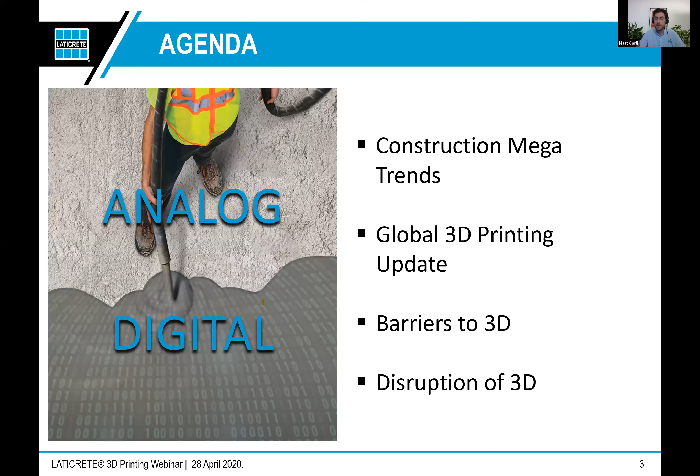Another one that we've seen change gears here with coronavirus is Twente Additive Manufacturing, a partner up in Canada. So they're working with the Ministry of Housing of British Columbia to do micro houses in areas of Northern Canada with First Nations people where they can't find laborers right now. And with construction shutting down in some parts, this is a solution where 3D rises to the occasion.

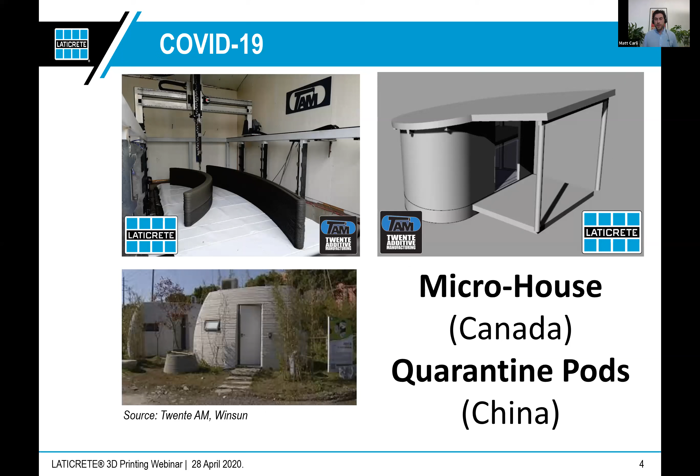But here in the US, we haven't shut down construction completely. We're still seen here as what's called an essential business. So we're allowed to continue operating despite quarantine, shutdowns, self-isolation, etc. But we're also a very litigious society. So making sure that everything is captured and all your workers are safe is a new concern.

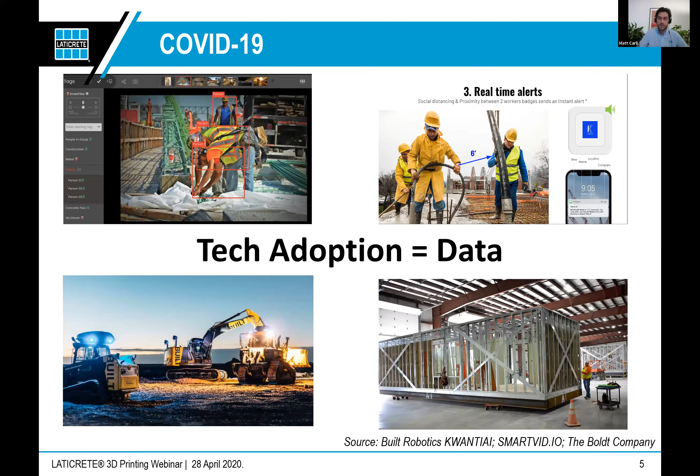So questioning the materials, the complete output of the building as a product is eventually going to work its way into higher rents, higher cost of a higher premium product. And again, you'll see how this connects to 3D printing in a minute.

We're also working with a company in California to do house repairs for the burnt areas. So building new subdivisions, building new homes where there was already a housing shortage, the fires just made the situation even worse.

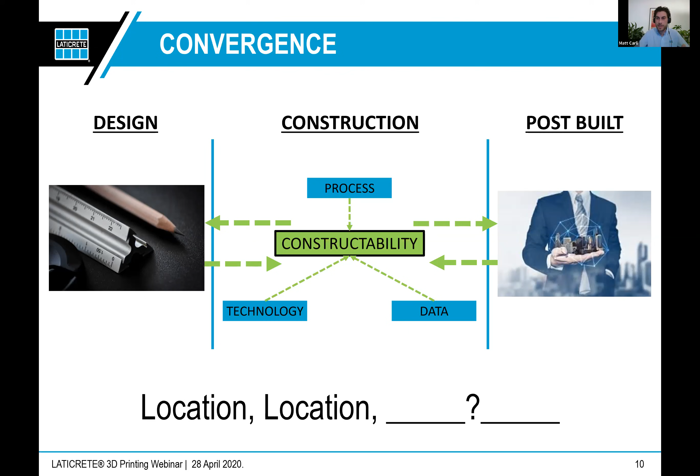So how does this all play into 3D printing? Basically, 3D printing is that computer model. So it's early design phase. You're taking it, you're splicing it into layers, and another name for 3D printing is additive manufacturing. So you're adding layer by layer by layer to construct the building.

So the big so what of this, again, is that as built is equal to the design. So the product that's on the other side is exactly what the design is, which for people in the manufacturing world sounds like a given. For people in the construction world, it sounds crazy. So again, this is the shift of mindset of people from the tech community, people from other industries that are not accepting of this 1% low productivity, or just accepting the status quo that construction projects always go over budget or always have these change orders. Yeah, that's not the new normal.

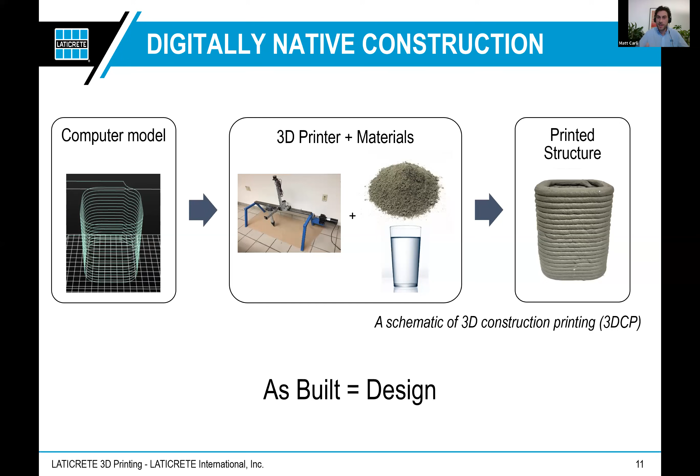Logistics, so this could be location. You look at the US Army Corps of Engineers, they're looking at using 3D printing for barracks in war zones where you don't want to bring people in. The example I gave earlier with Twente Manufacturing, going to Northern Canada, going to remote locations where you're limited with your workforce. 3D printing offers an easy contained solution to execute a job. And in Northern Canada, you also have a small window where you can build. So it brings alternative solutions of a premium product up there rather than modular construction that would have been subjugated to the transport of what you could carry up to some of these remote locations.

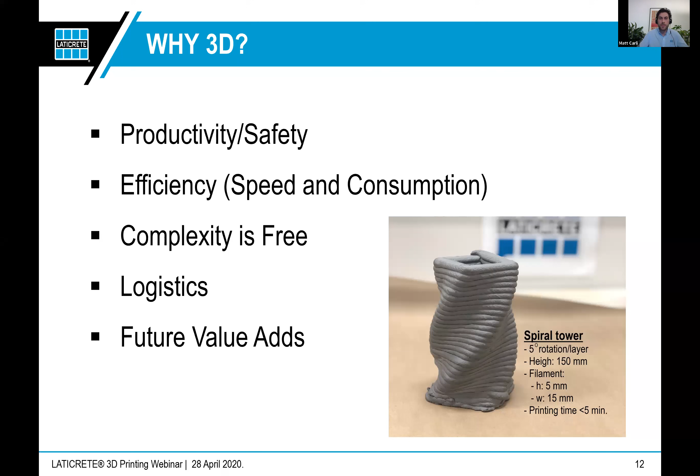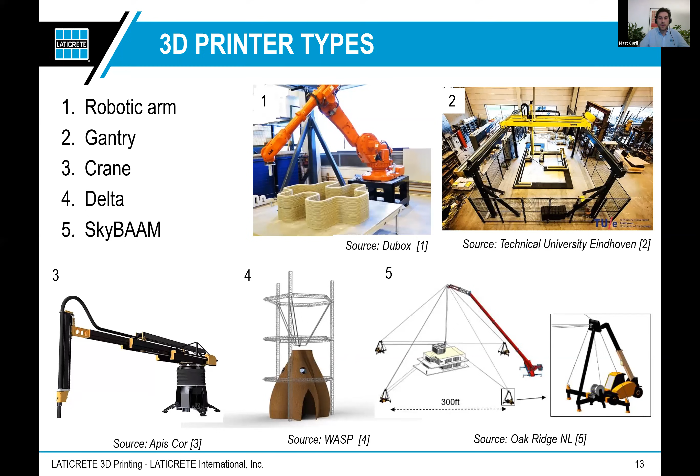Or you have AI SpaceFactory. There was a big push by NASA with a challenge of how do we build on Mars. So using thermoplastics mixed with a Martian-like aggregate. So there are alternatives being developed. And again, a lot is still in the experimental prototype phase.

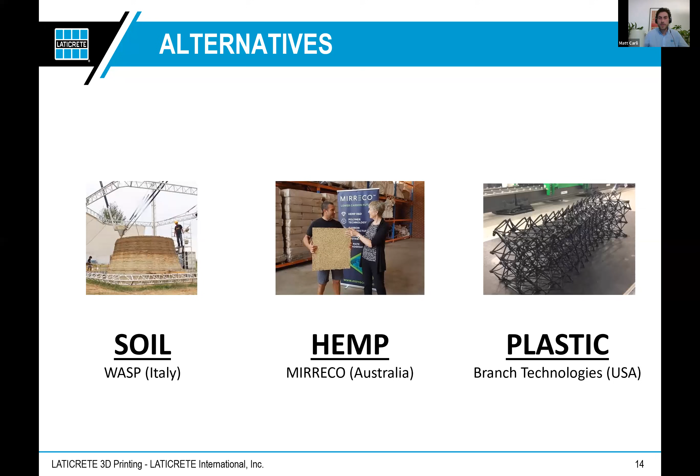So as Yoni mentioned in the beginning here, we're looking at 3 really key development markets for 3D printing. Dubai being front and center. Edward's going to talk much more about the Dubai market. The big announcement there is a government push with the Sheikh proclaiming that 25% 3D printed components will be on the job sites by 2030.

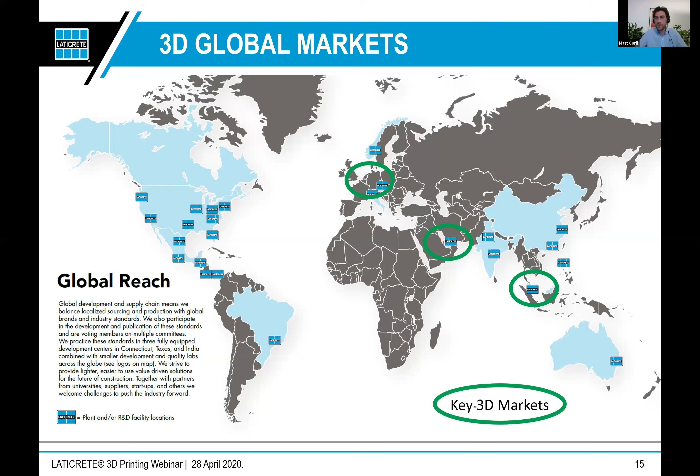So this is obviously a huge call to action, and has created and fostered an environment to bring that actually to fruition. Another cluster that we're seeing is the Netherlands, and then Singapore is a big developmental hub for 3D printing technology. I superimposed it over the Laticrete network. So this is just where we have plants and facilities globally, and looking to capitalize on those to produce the mortar as local as possible.

So what is a 3D printable mortar? There's really three main characteristics behind a 3D printable mortar. First one, thixotropic, or the rheology of the mortar has to be such that you can mix it, pump it. So it has to be fluid under pressure, and then as soon as that pressure is released, it has to hold its shape. So it's extruded out of the nozzle, it comes down, and you want zero slump. You don't want the material to flow out. It has to hold the shape of the nozzle, and then after that, support the weight of subsequent layers.

Behind the scenes, again, it's still an emerging market. So a lot of what we're doing is to make sure that this product is available and ready to be accepted by the market. So the certification, there's a lot. This is an hours topic amongst itself, but we'll talk about it a little bit more in a second. Localization. So again, we're shipping heavy materials here. We're shipping essentially a cementitious mortar mix. So we want to localize as much of the material and produce it as local as possible.

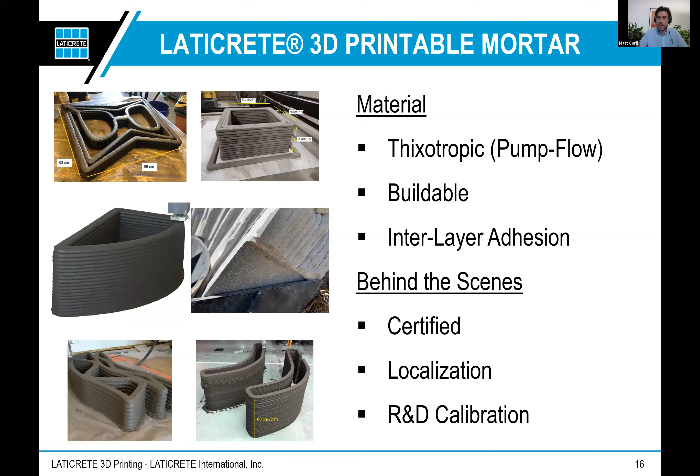In Dubai, looking at the United Arab Emirates, again, we localize the material. We produce in Ras Al Khaimah, the emirate next door. The product was certified by the Dubai Central Lab and also weather tested. We took a sample, printed in early January, then left it throughout the year out on the grounds of our factory, so subjected to all the Dubai heat of the summer, and monitored it routinely for cracks, and happy to report that there weren't any cracks on the printed structure that we left outside. So it definitely performed beautifully, and this is the project you'll hear much more about in detail. And Edouard has some pictures that are going to be released tonight, actually.

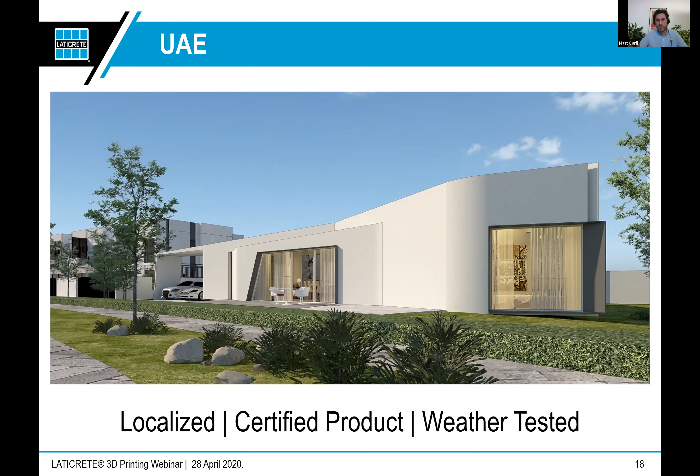This is a big push by the Indian government to make sure that everybody has access to toilets throughout the country. So we're working closely with the government. There was supposed to be a release earlier, with coronavirus and now complete shutdown in India. Hopefully we'll be able to make some more announcements and get this project moving quicker here in the next couple weeks.

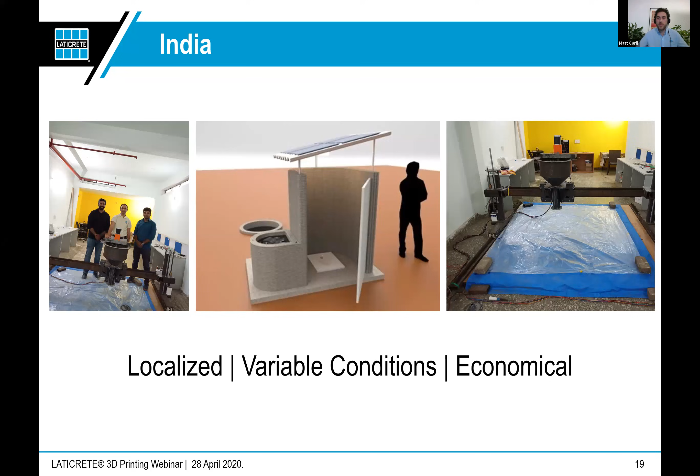Singapore, as the host of this, I just wanted to mention again, it is part of this cluster. We're seeing really strong support from the university side and from the government side. So NAMIC, the National Additive Manufacturing Innovation Cluster, providing funding, coupling with the strong universities, the National University of Singapore and Nanyang. And so we're starting to see this really strong collaboration hub cluster develop in Singapore. That's just an example we just saw with the India project that was developed in Singapore first and then brought to India. So I definitely foresee much more of this happening.

In addition, just a note on the market. So a lot of what we've seen and talked about with 3D printing are standalone one-story or ground plus one structures. A lot of the Asian markets are much denser, so China in particular. So we're probably going to see more in the way of 3D printed facades, components, prefabricated parts that are going to be 3D printed and integrated into structures.

So it'd be interesting as the Asian markets really adopt the technology and take off, that we're going to see really different use cases in Asia and Dubai and Europe. Europe is going to be much more productivity, safety on the job site. Dubai pushing the envelope, avant-garde, just adopting the technology really across the board. And then the Asian markets, we're going to see much more of this integration with facade and prefabrication, at least in my opinion.

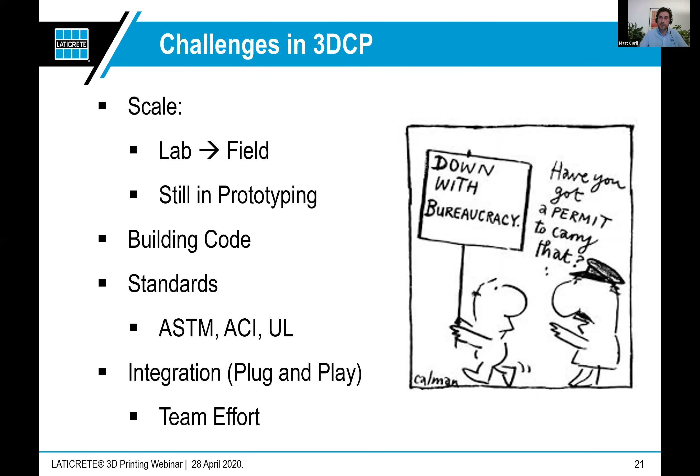But with that, and trying to leave on the high note here and wrapping back to where I started talking about this 1% increase in productivity. Again, 3D printing is not necessarily going to be the solution for everything, but we're talking about an industry that's 13% of global GDP. It's a massive space for disruption to happen in. And why I call it the Trojan horse, again, it's digitally native technology. You have to understand how you're going to build a structure in the early pre-planning stage.

So when you look through this list of where the productivity is going to come from in construction, reshaping regulations, we talked about that, rewiring contracts, people are going to think about these differently. Design, complexity is free, consumer demands, again, 3D printing is a solution. Procurement, supply, it's a completely integrated supply chain. And the takeoff is exact one-to-one. On-site execution, again, your robotics, it's a digital twin. The product is what you're putting in the system. So the output is a one-to-one, as built, matching design.

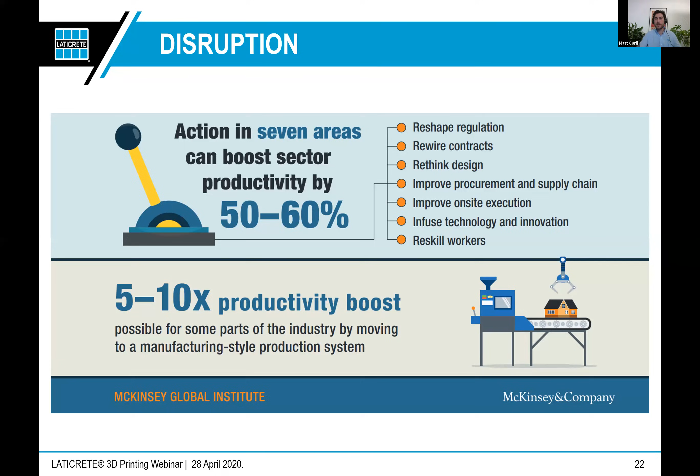The technology, infusing innovation and technology on the job site, that's a given with 3D printing, which is definitely new to construction. And reskilling workers, training them to be 3D printing operators. So it really hits everything on this list for a future disruption. It's really forcing people to think differently and ask the questions needed to then make the future more productive in the construction industry. So I think Edouard will go much more in depth about the job sites and a couple examples globally, but open for some questions right now, I think, Yoni?

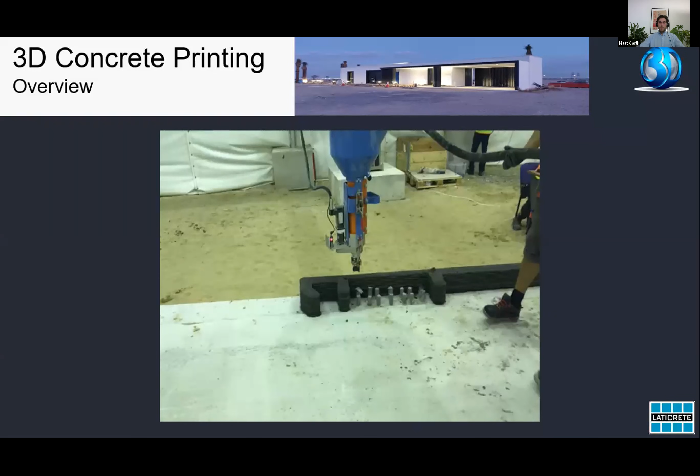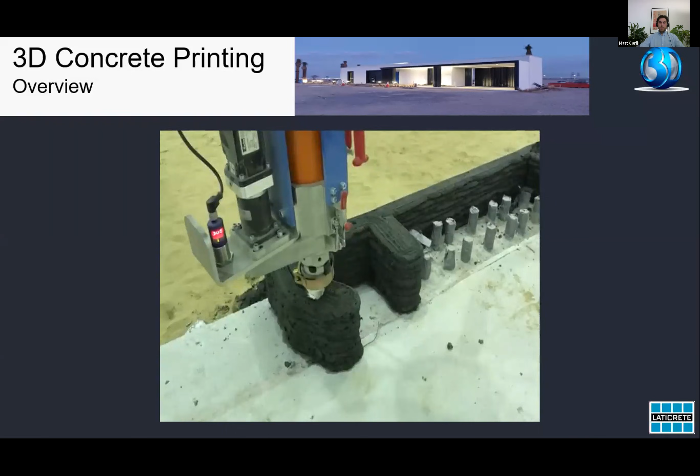So you can see that we are forming layer upon layer, and in this case we're using the Laticrete material. And you can see that the printer is basically executing, without any intervention from any worker, the design that we did.

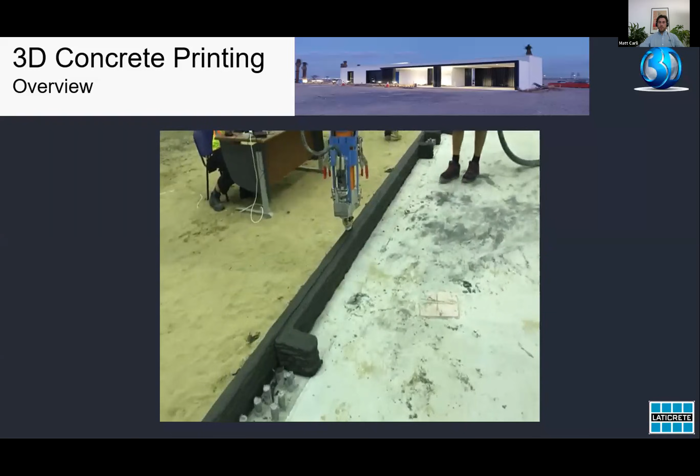Now, what are some of the current printing technologies that are available globally? There's a whole bunch, but these are the main four technologies. There's the gantry system that you can see on the top left. There's the robotic system, which is basically just a robot that you can print with. And then you have the telescopic arm. And then you have a hybrid.

You can have a robotic arm that is on a gantry system that moves in different directions. So you get multiple degrees of freedom, multiple freedom of movement. And you can, in that case, do very, very complicated designs. For the project that we have done in Dubai, we've used the robotic system, and we've also used the gantry system.

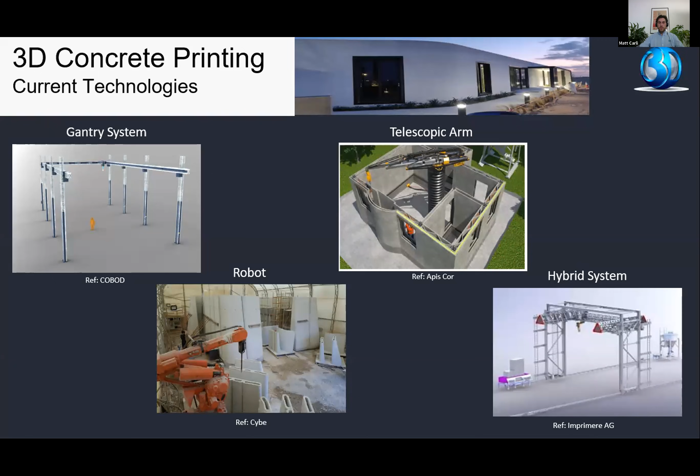So there's first the BOD, the building on demand project that was done in Denmark by COBOD using a gantry system. And then we have the project that was done in France, also at the university site at Nantes. There's also the 3D printed house that was done using the WASP soil that Matt previously mentioned.

Some other projects also by Winsun. Winsun have done a lot of prototypes and projects; if you go to China, they will show you these projects. Some are pavilions. They've done a 5-story building also. There's also this nice project in the Netherlands that is being done as we speak.

In Dubai, there was the Office of the Future that was also executed by Winsun. It was prefabricated in China and shipped to Dubai and assembled in Dubai as well. There are a few projects also in Manila and in Russia.

In Dubai, 3D Vinci was involved in the two main in situ projects that were done here in Dubai. The first was with the DEWA R&D lab, which was a 140 square meter office that we did with CyBe, and it was using a robot. So basically what we're doing is we're printing panels and moving the robot.

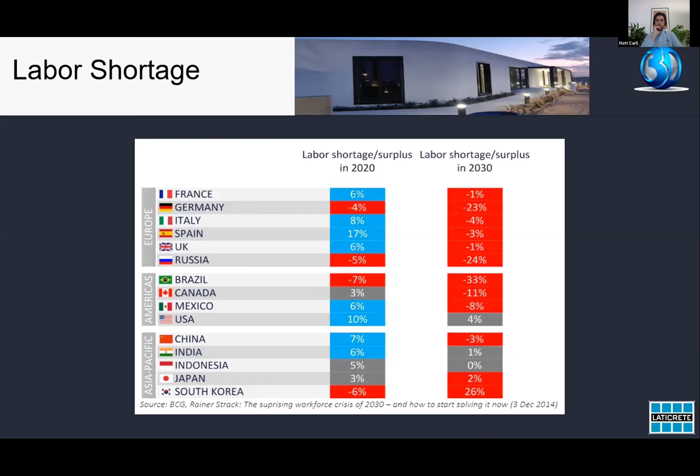From a labor shortage perspective, we can see that by year 2030, most countries will actually be facing a big labor shortage. You're already seeing it right now. And with COVID-19 and the pandemics, everybody is trying to move to a smaller labor force to minimize spreading of viruses. But even if we put that aside, there's already a big shortage coming by year 2030.

From an affordable housing perspective, take any country in the world and you will see that there's a shortage of affordable housing. Estimates by McKinsey Global Institute find that there's 330 million urban households living in substandard housing. And there is no solution for that right now because of the construction costs, the speed of construction, the availability of labor. We are not able to answer this kind of shortage.

And printing can actually be... can you hear me? I got a message here.

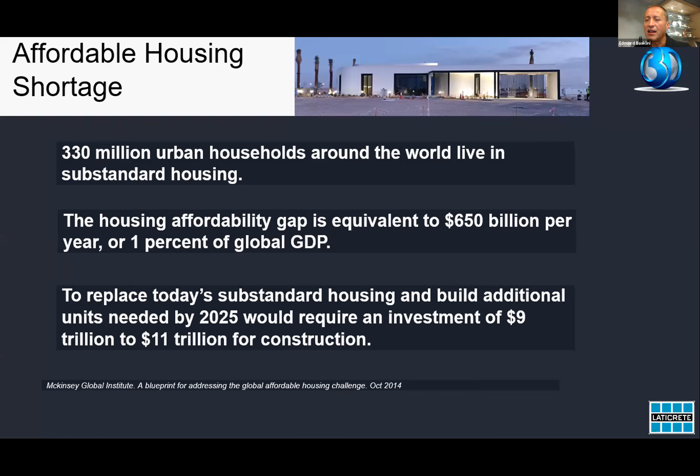Okay. Yes. All right. So, the global shortage of affordable housing is a real thing, and 3D printing can actually be a serious and reliable solution to answer this shortage. So, how does 3D printing help with these kinds of issues?

First, reduce labor costs. In 3D printing, the labor to build a house, the walls, the columns, all of this can be done using 2 or 3 laborers. You don't need the whole army of laborers, and I'll talk about that a bit later.

Reduce materials. There's practically no material wasted in concrete printing. What you use is what you need. There's no formwork, there's no tools, it's just a computer and material and a couple of laborers. You can actually also improve the design for free.

Matt mentioned complexity is free in 3D printing. Same thing. You can do really improved design without having to add any cost to your building. One of the important aspects here is when you look at some of the houses that you go around, they are blocks. I mean, many of the buildings, it's like all the houses are the same. With 3D printing, each client can have their own house customized to their needs without having to pay any additional cost. And the reduced duration of construction.

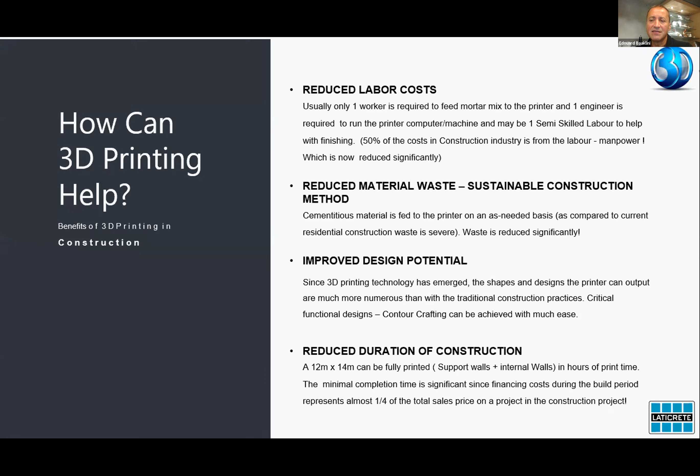Usually villas, houses, buildings take months, years. With 3D printing, now we're talking about days and weeks rather than months and years. So again, anytime you introduce a new technology, you want to see that it is faster, cheaper, and better. And we claim that 3D printing can actually do that. From a customization perspective, you can do more intricate designs as an architect. You can mass customize it to the different clients.

From a cheaper perspective, the initial calculation has shown that it can be 50 to 80% lower in labor cost. As well, and I will discuss some of these in detail later on in the presentation, waste in terms of formwork and others. And if you look at the total cost associated with construction, because you have a shorter duration, any financing will also be much less with 3D concrete printing. And it's faster, definitely it's faster. We finished the villa in 4 or 5 days of printing. That's how fast you can actually do your projects.

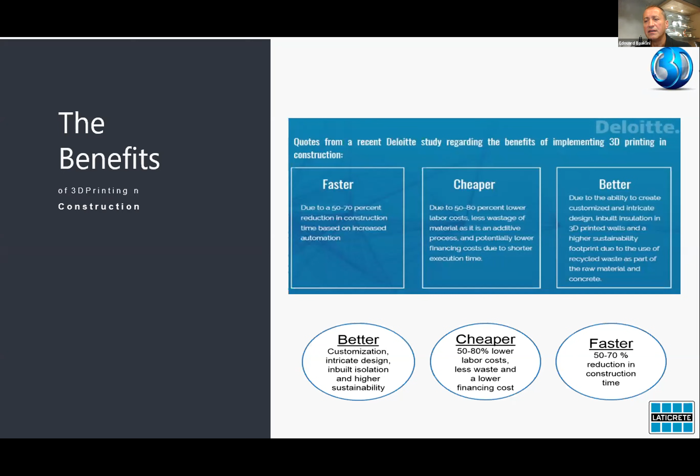So when we come to 3D concrete printing, we are basically digitizing construction. And what we say is 3D printing actually holds the promise of transforming the construction industry into the digital era. I know the construction industry is a very traditional, very old industry, but now we have technology that can actually move it into the digital era, just like many of the other industries in the world.

It is disruptive in nature, definitely, and that's the challenge. You're going to have to basically change the entire scope of how construction is approached. I'll show you a slide in a minute where the new model is completely different than the old model of construction. Usually the construction industry is linear, vertically and horizontally. With 3D printing, it's more circular. The designer, the architect, the client, the 3D printing provider, the material scientist, all have to be involved at the onset of the project so that it gets done properly and it gets done fast. Many of the organizational roles, responsibilities, activities, skills, the supply chain will be completely disrupted with 3D concrete printing, to the better, of course.

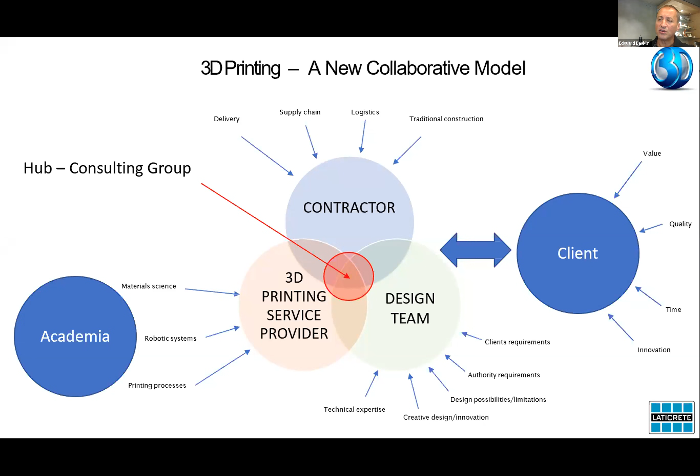So if we want to compare concrete printing to traditional construction, with traditional construction you'd have the concrete blocks manufactured somewhere, then you have to transport the blocks to the site, and then you have to have some skilled labor able to work with the blocks, and you get a whole bunch of waste and garbage that you have to manage as well. It takes a long time to do these houses, a big labor force, and basically it's difficult to scale. You have a whole army of laborers if you have a big project.

All of these can be answered by 3D concrete printing, meaning that you only have the material on site. You don't have to have it produced in a factory and then shipped. The printer is usually on site, so it's in situ printing. You don't need all of this transportation, so you cut on transportation costs. Skilled labor, you only need 2 or 3 laborers to operate the printer.

Material, there's no material waste. That's all you need. We'll talk about that in a minute more. And then in a few days you're done with the building.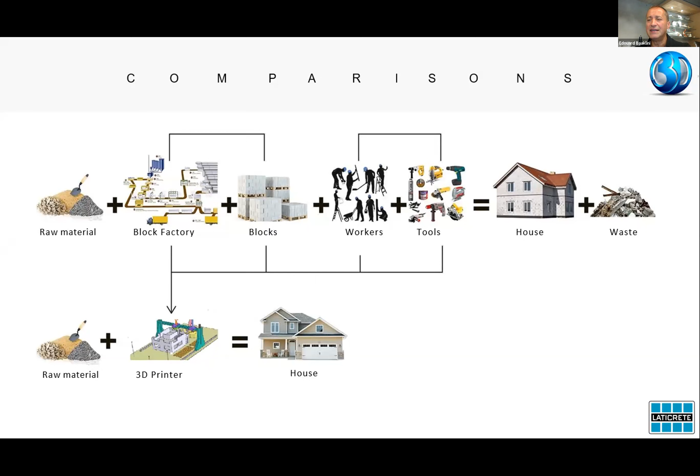But the key to all of this is the mortar, the concrete mix. And I think Matt talked a little bit about that, and I'll also mention it briefly. So someone was asking about the compressive strength, and yes, most of the material can be customized to have a certain compressive strength. You can add plasticizers, retarders to it. You can change the mix. And again, I go back to the collaborative model where when the design is being made, when the project is being launched, all of these have to be taken into consideration.

So right now with the Laticrete material we're using, it's achieving a compressive strength of 35 plus megapascal. And you can actually custom make that to reach a certain compressive strength as well as flexural and tensile. Again, the material has to have optimized layer bonding and adhesion, because as you're depositing the layers on top of each other, they have to really bond, they have to adhere together. And it's not only in this case just the parameter or the material itself.

Actually, there are other factors. I will not get into the details here, but there's the speed of the printer, there's the ambient humidity and temperature that also affect these kinds of things. You want also the material to be homogeneous. So when you take a cross section of that wall, you don't want to have areas where there are bubbles or voids, so you want it to be homogeneous.

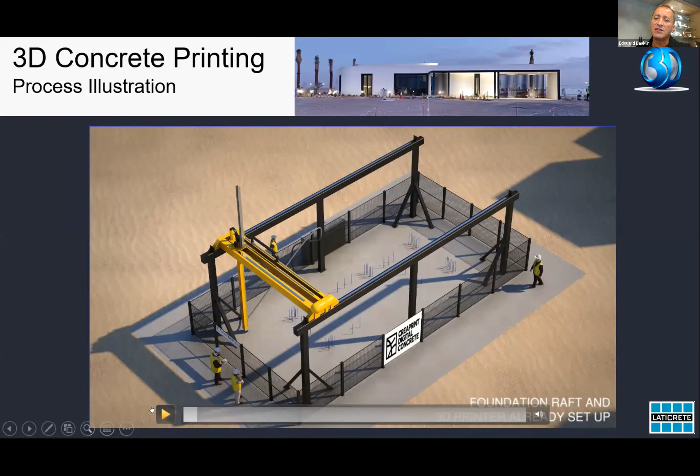So basically, what we do here is we start with a floor slab, just like any regular building, any other house, and you can see the rebars in the slab itself. And what we do is we start printing a double wall. Again, this is just an illustration. The way you approach a project is different from one project to the other. In this case, the walls are about 5 centimeters with a void of about 10 centimeters. The real dimensions, the specifics, all depend on the design itself and on the structural analysis that needs to be done.

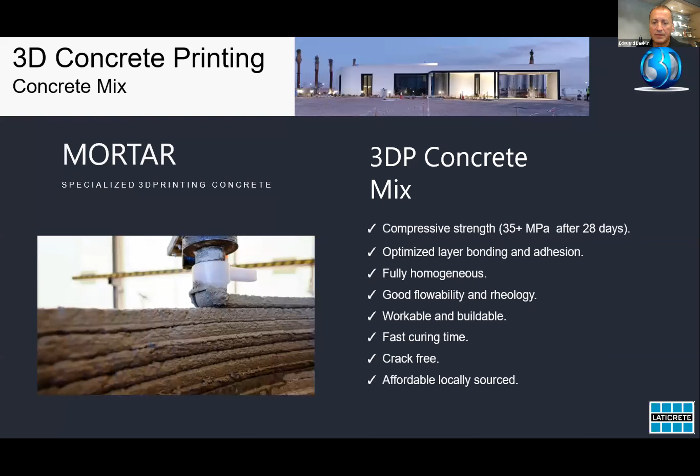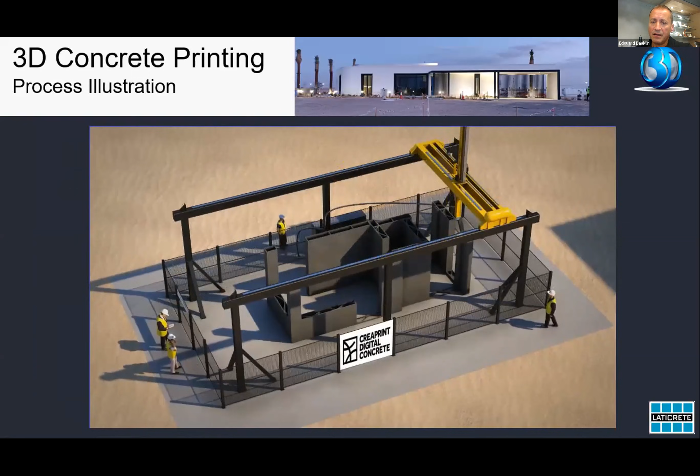So right now the printer is printing, and like you see, it's printing around the columns, and everywhere that you see a void, that's where you'll have the windows and the doors. We are also printing the internal divisions inside the house, so the internal walls are also being printed at the same time. And you can see that from a labor perspective, there are only 4 people there. And you'll see it in a minute in a live video how it actually works.

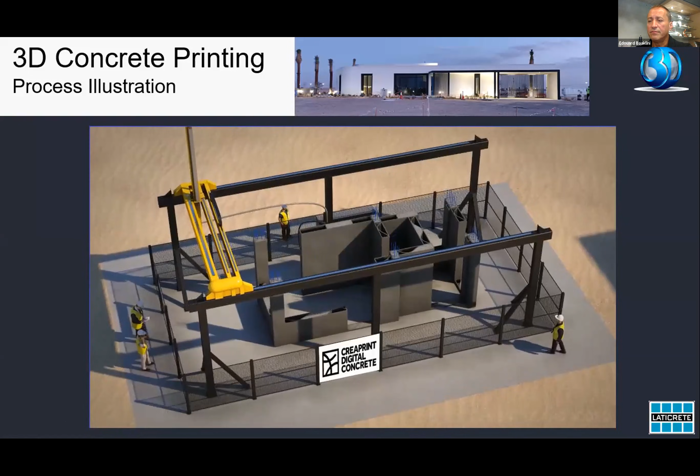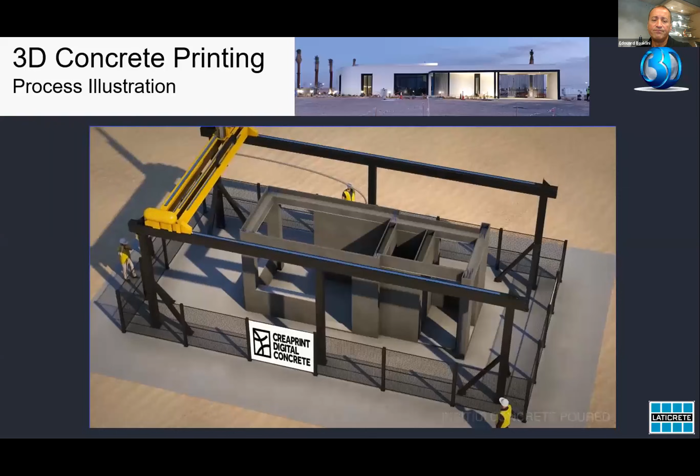And then what we do is we put the reinforced concrete and we pour the concrete in. Then we put the cement boards. We continue the 3D printing. Basically, right now we're preparing it for the roof. The roof can be anything. It can be in situ pouring of the roof, or it can be hollow cores. And once we're there, we finish it with the parapets.

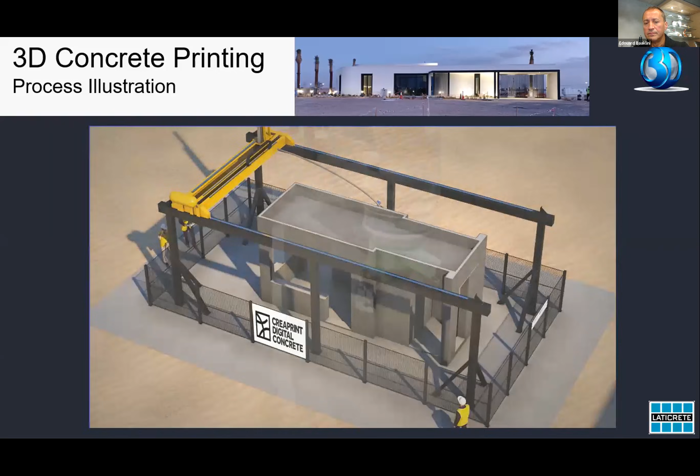This is a typical, I think you've seen this before, so I'll just move on. So what are the opportunities that we get from 3D printing? First, you get the construction of complex shapes at absolutely no cost. You have product integration in the construction itself, mass customization, construction automation, and faster construction time, and I'll discuss each by itself.

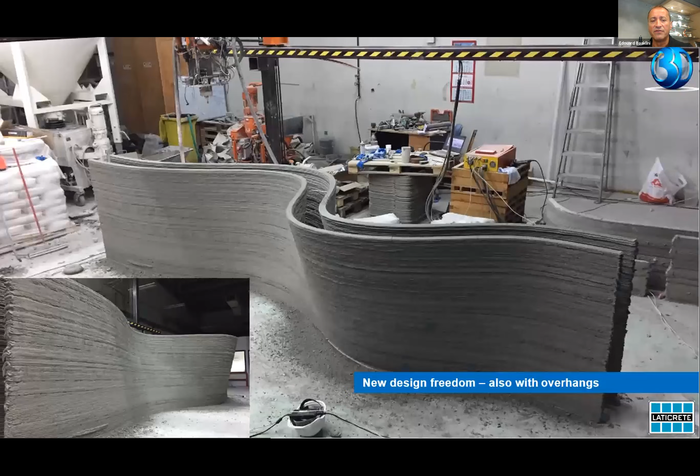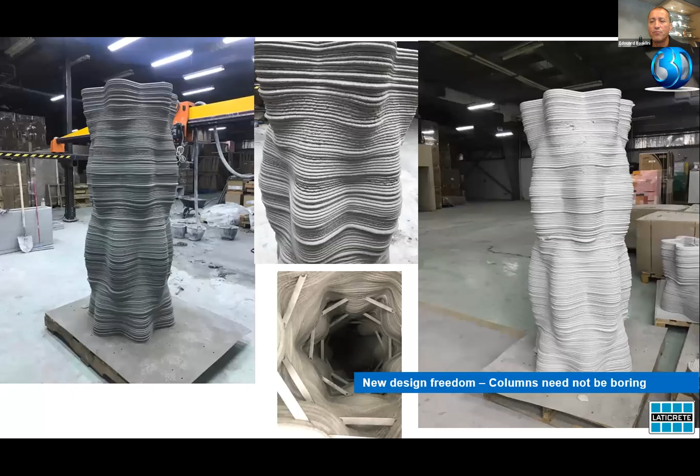When we talk about the freedom of design, this is some of the stuff that you can do with concrete printing, and this is something that we did here in Dubai. You can see that it's double curved with about a 20% overhang. Some of the stuff that you can also do, these can be columns, for example. So these can be the column inside your house that you can pour concrete in. And all of this, again, at no additional cost.

You can do wall designs as well. So you can program your printer to be able to do these kind of intricate designs. Some of the projects that we're involved in right now is where you have different walls of the same villa, some of it with this kind of design, others with maybe more straight lines. So it's open. For an architect, it's really a nice tool to have. You can change the walls without really adding to the finish later on in your project.

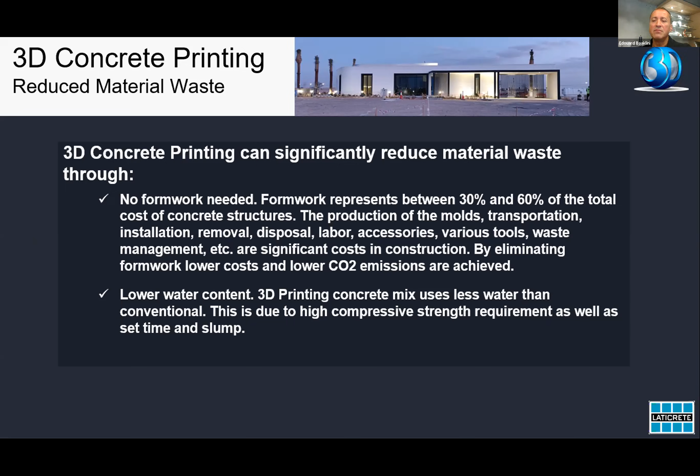Reduce material waste. The biggest reduction in material waste in 3D printing comes from formwork and water, but primarily from formwork, because mostly formwork represents between 30 and 60% of the total cost of concrete structures. So by eliminating that, by basically having your formwork 3D printed, you eliminate, first of all, the waste, and you eliminate the time that you have to take in order to build these formwork.

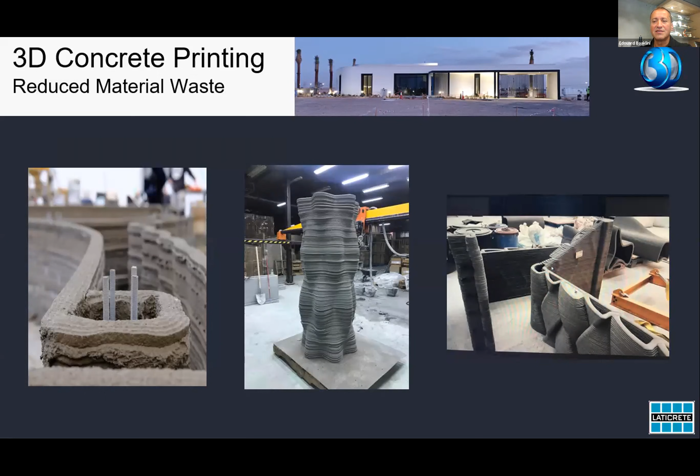So here in this case, on the left corner, you can see that the 3D printed concrete is the formwork for that particular reinforced column. Same thing in the middle. And on the right-hand side, I don't know if you can see it, but in the middle, you introduce the column as part of the design itself. It's not something that sticks out. So it's integrated within the design itself.

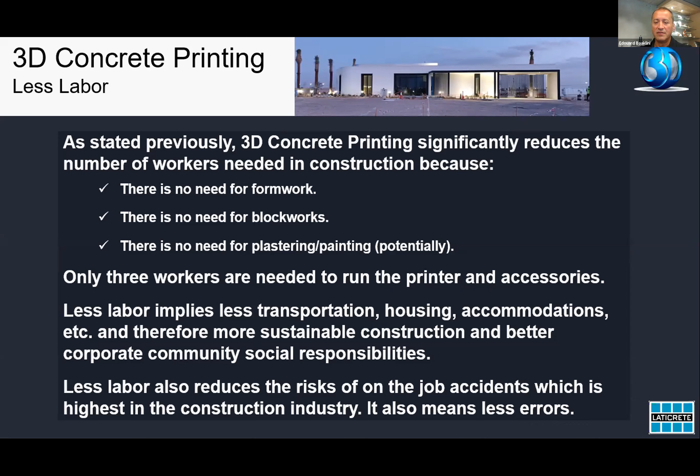Less labor again. With 3D concrete printing, because you don't need formwork, because you don't need block works, and potentially we don't need any plastering and painting afterward. Many of the materials can come in a different color with different dyes, so all of this can be part of the initial design, as I said, when the project is being launched. We only need 3 workers to run the printer and all its accessories, being the pump and all of this stuff. Of course, less laborers mean less transportation, less accommodation, less social distancing. So all of this will actually lead to more sustainable, viable, cheaper construction, as well as fewer accidents.

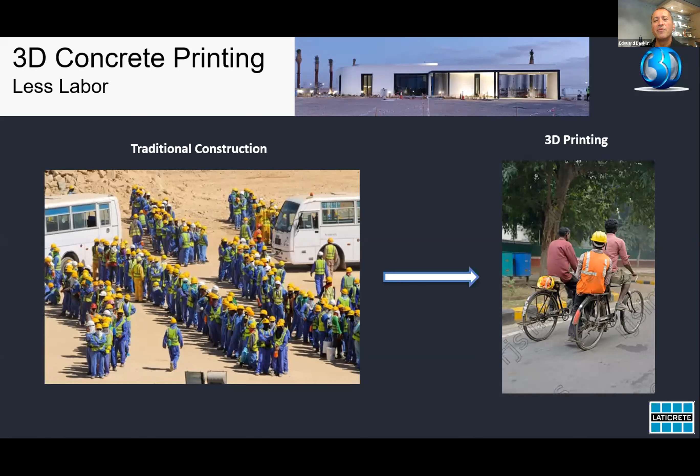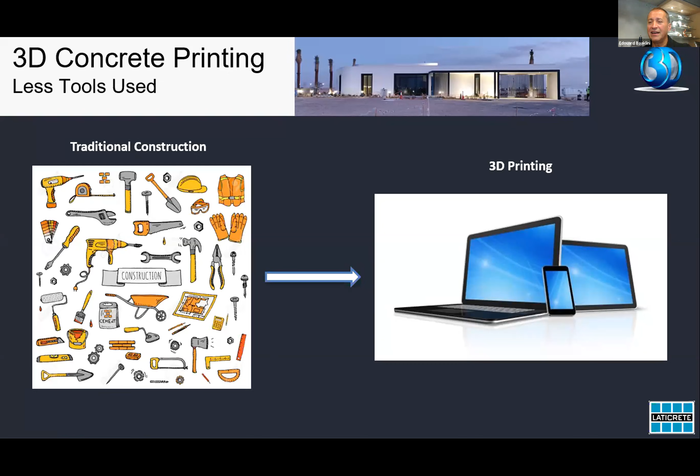So what we want to do is, I don't know if you've been to some of the construction sites here in Dubai and the GCC. Basically, you have armies of laborers. Buses come, they pick them up, they take them to where they live. What we want to do is we want to be able to go from a traditional construction of armies to basically 3 people who are operating a printer. And again, you want to go from all of these tools that we use and waste in traditional construction to basically having a laptop or a mobile phone or computer.

Product integration. Again, with 3D printing, you can integrate MEP elements within the design itself, in terms of the piping, in terms of the outlets of your electrical and sanitation. So all of these can be accommodated within the design itself at the onset, and that's why it's very important to have all of these set up at the beginning. When I talked about the collaborative model, you have all of these clear from the beginning, and then you can start printing and going with it.

You can also, because you have this void between the 2 walls, introduce foam insulation or different kinds of insulation. With some insulation right now, the printer can actually pour that insulation inside, so you don't have additional equipment that needs to come to do the insulation itself.

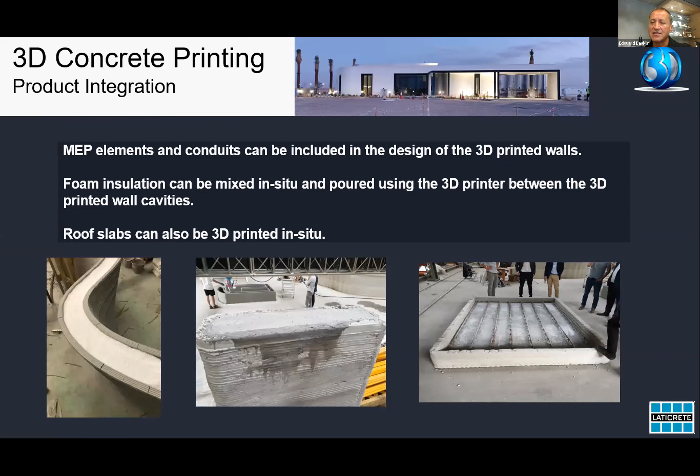Also, we're working on 3D printed slabs, roof slabs, but this is still in development, but it's coming. Now, from process automation, because we're digitizing, because we're moving into the digital era, we feel that 3D concrete printing can actually escalate the speed at which we can digitize construction.

So you can use finite element analysis. You can do topology optimization to be able to have the best design given the parameters of the concrete and given the parameters of the design itself. And you can basically iterate in this area where you have the BIM design being reanalyzed for compatibility. You do the topology optimization until the client is happy with the design itself, and then you are ready to send it for approval.

Now this can be sent for approval online as well. So there's no need to go to the municipality or to the authorities. And then again, you go through the same iteration where if there are any online calculations or corrections that need to be done, you can go back to the BIM model and go through it until you get the approval online.

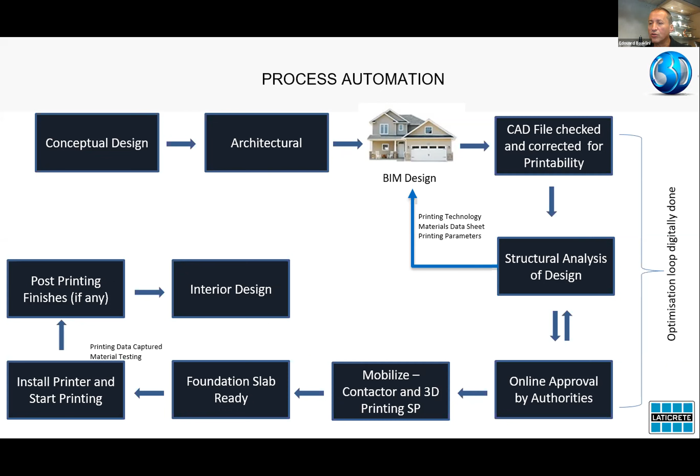So again, from process automation, what we're doing is trying to cut many of the time-consuming steps, especially when it comes to approval and bureaucracy. Structural analysis can be done using finite element analysis, using new tools that have to be developed. We can do topology optimization as well.

When we were doing the project here in Dubai, our 3D printing team had the computer with a 3D model, and that's all we needed. Whereas the other team, the contractor, were bringing stacks of 2D shop drawings, and you can see the contrast. And I think that eventually we don't need any more 2D shop drawings. This will be obsolete.

Also, from process automation and in the world of big data, the printer itself can keep many of the parameters in terms of speed, humidity, all of the metrics, and it can be saved for later analysis, if somebody wants to go back and see what's happening. So all of this is digitized. There's no need for any manual entry. Everything is in real time when you automate and digitize the process. So from a sustainability perspective, fewer trips to the municipality, fewer trips to the authorities, no paperwork. All of this becomes automated.

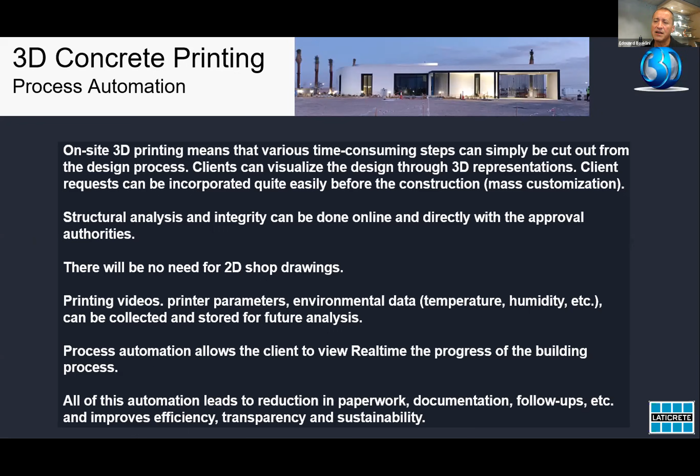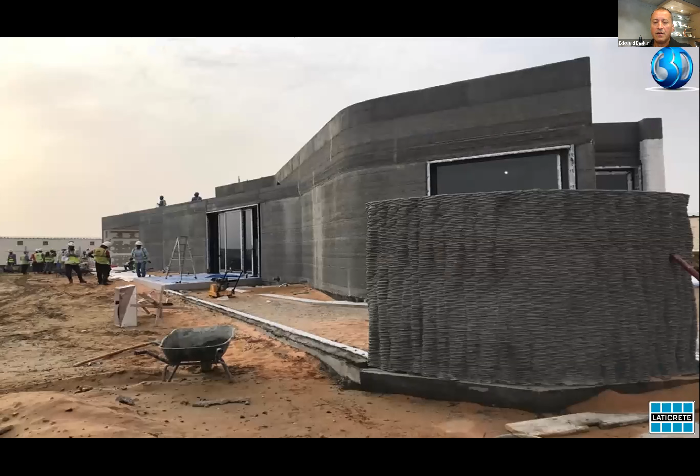So the project that we just finished here in Dubai is a 3D printed villa. This is probably the first commercial villa ever, I know in Dubai, in the GCC at least, but I think globally, where this villa is actually on the market and being sold to customers who are going to actually live there. So this is how the villa looked after it was done, before we did any work on it, this is how it comes out. And now this is how it is.

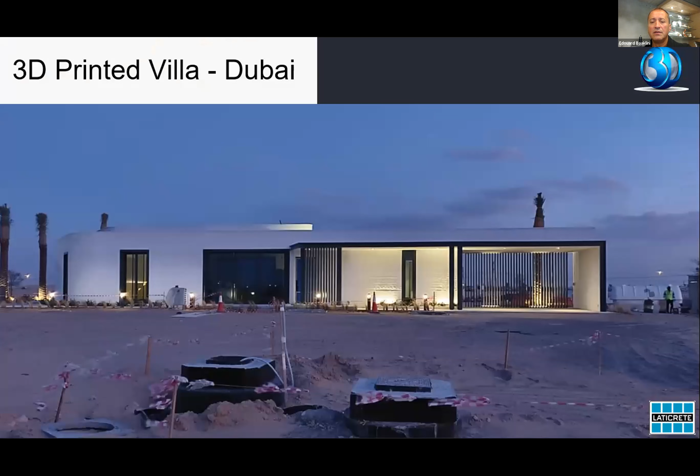Really nice work. We believe that the architecture can be a bit more challenging, can take more advantage of the power of the concrete printer. So these are additional side views. And you can see the curves and the curvature. There's no additional cost to that, there's no need for skilled labor to do these kinds of curves.

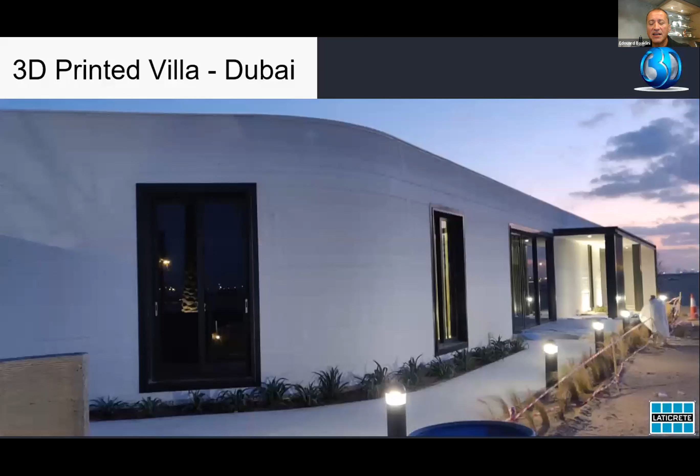Again, different views of the villa. And you can see here the edges where they come. I mean, again, you get them free. There was no additional cost to that. And all of this was done in 5 days.

The villa was printed, was painted. We didn't do any plastering, just basically painted it in with this color. These are the internals. So some of it we did do some plastering, but the client wanted to show some of the walls still in their native 3D printed look and feel.

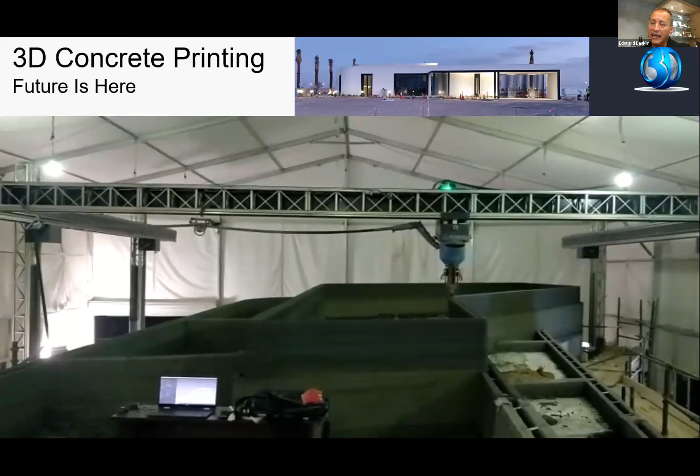So, in the age of coronavirus and pandemics and social distancing, I think we can say that 3D printing is probably a really much needed welcome disruption. Why? Because in 3D printing, all you need is this. This is actually a video from when we were doing the villa in Dubai. There were only 2 laborers, and this probably was like after midnight. And the printer was printing. We had a computer and the guy behind the camera filming the printing as it happened.

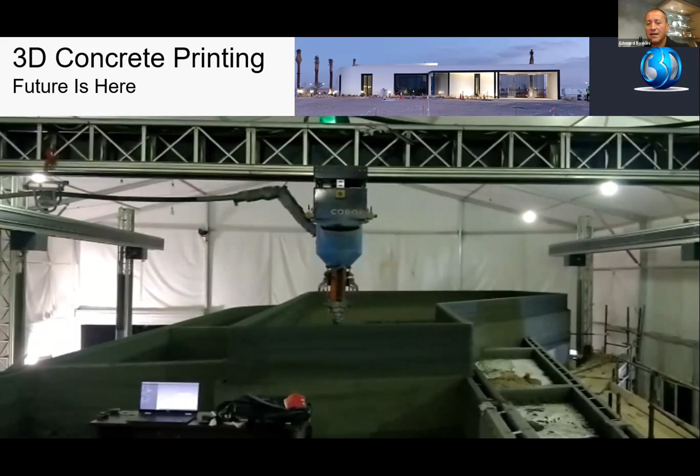I think that the video speaks for itself. That's it. So the future is here. Right now, after the success of this particular project with Laticrete, the client is interested in scaling this, and this, like Ahmed was saying, brings its own new challenges, going from one villa to multiple.

We have to define many of the issues of supply chain, with organizational roles. We have to do a lot of training for the contractor in this case. So I think that the future is here. Dubai is definitely on the leading edge of this. They are really pushing this technology, and hopefully we'll have many lessons learned to be shared with everybody in the world on how to take this technology and make it scalable, cheaper, and better. Thank you. Any questions?

Thank you, Edouard. Beautiful villa. Can I get one of these days from you?